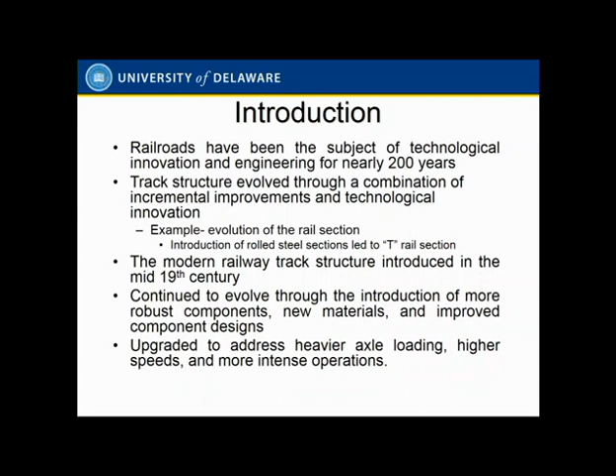Early railroad engineering focused on building railroads, and we're still doing some of that. Right now the big new railroad is California. California is building a high-speed railway, and we build some railways here and now, with new innovative construction techniques. Certainly in China right now, where they've just built 10,000 kilometers of high-speed rail in the last decade and a half or so, there are new innovative construction techniques.

But for most of the world, railroad also consists of maintaining the structure. A lot of the innovation, a lot of the opportunities, a lot of the applications of sophisticated technology are coming to bear in the maintenance. So we sort of have two hats when we're dealing with the railroads: we're dealing with railroad engineering.

We have building the railroad, designing the railroad track, and then we have maintaining the railroad track. Railroad engineers do a little bit of both, and depending on where you are, you'll emphasize one over the other.

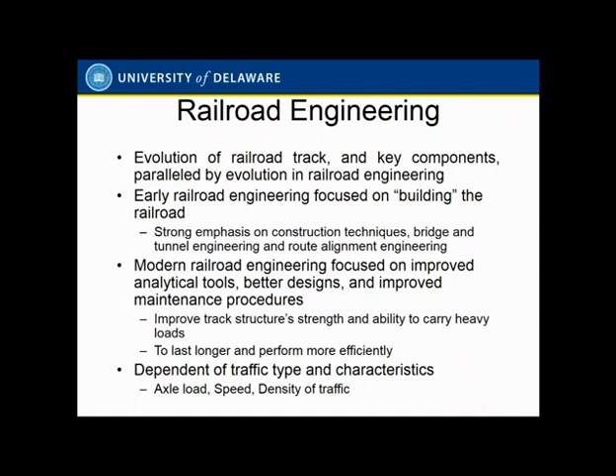Okay, so what constitutes a railroad? Well, railroad comes in various shapes and sizes and flavors. We have freight, which is what you see heavily in the United States.

The first question I'm usually asked when somebody introduces me as a railroad professor is, why do we have such a lousy railroad system in the United States? Well, the reality of it is, according to the World Bank, not according to me, we actually have the most effective and efficient freight railroad system in the world. Our passenger systems can use some improvement, but we actually have, again according to the World Bank, one of the most effective freight systems in the world.

And so when we talk about freight, we talk about conventional freight, mixed freight, heavy axle load, unit train operations.

Here in Chicago, you don't have to go very far to see a bunch of freight trains going by. You just got to drive down the road and see them going out.

Then we have passenger rail. The high end of passenger railroad is, of course, the glamorous high-speed rail. High-speed rail, as we'll talk about in a few minutes, means many different things to different people. There's no uniform definition of high-speed rail.

Then we have conventional interurban rail. Interurban rail is when we go from one city to another. Basically, if you take an Amtrak from Chicago to New York, that's an interurban rail operation.

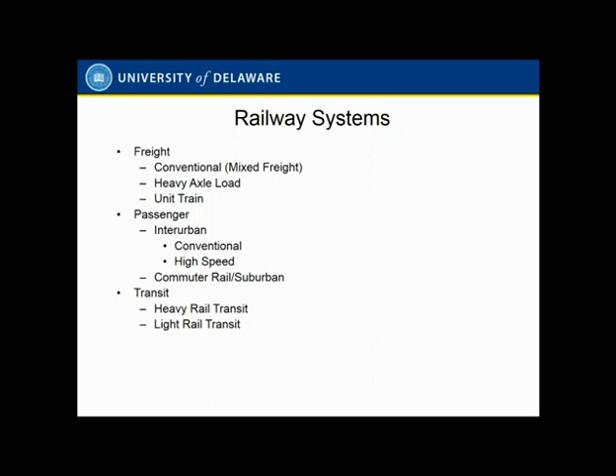Okay, so I want to talk a little bit about the track, the engineering behind the track, maybe a little bit about vehicle-track interaction, because you really can't talk about the track without defining the load environment of the track. And the load environment of the track is primarily, but not exclusively, the trains.

So the purpose of the track structure is to support the trains at speed, guide them, because as we know, there's no differential steering in a railroad axle, so the track has a guidance function. It also needs to damp noise and vibration, which again becomes very important.

I remember one time I was in London Underground doing a grinding project. We were in the middle of the city somewhere, and the London Underground engineer came to me and said, 'We can't have any noise and vibration at this location.' And I asked why. He said, 'Madonna lives up there.'

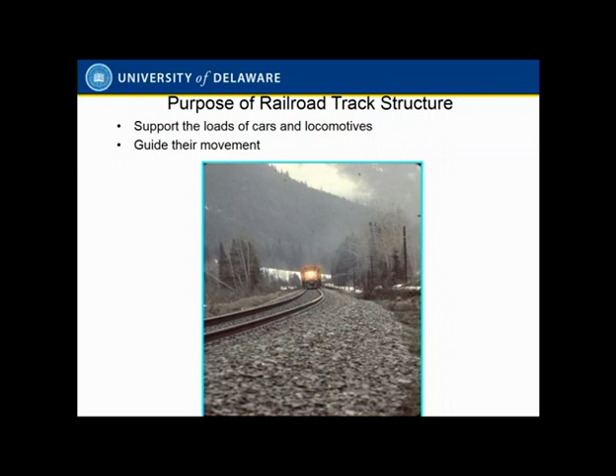Control of noise and vibration is another of the many functions of railroad track, and one that's taken on increasing importance. Again, this is one of the areas where we're looking to improve and innovate and develop techniques to do so. Okay, so, the railroad track.

Railroad track is still primarily ballasted cross ties, rails on cross ties on ballast. The cross ties can be wood -- 90% of the ties in the U.S. currently are wood. They can also be concrete; we get about 9% concrete in the U.S. In Europe, it's about 60 to 70% concrete. They still have about 30 to 40% wood, even in Europe.

Other parts of the world are often driven by relative cost. This is where engineering economics come in as well. Those are the big two cross-tie components. But we also have steel, which is a niche component, and we have growing interest in plastic and composite, which is no surprise considering the trend in society and engineering towards sustainability, recycling, and more use of non-traditional materials. So that's a growing sector.

There's still some playing around with other designs other than cross ties, such as frames or longitudinal ties, but again, you don't really see a whole lot of them. If you're going to go to a ballasted track structure, it's going to be a cross tie structure. Non-ballasted track is either slab track or embedded track, which is your trolley track that runs in the street. That's still a relatively small niche, even though some high-speed operations have started to look at it, particularly for tunnels.

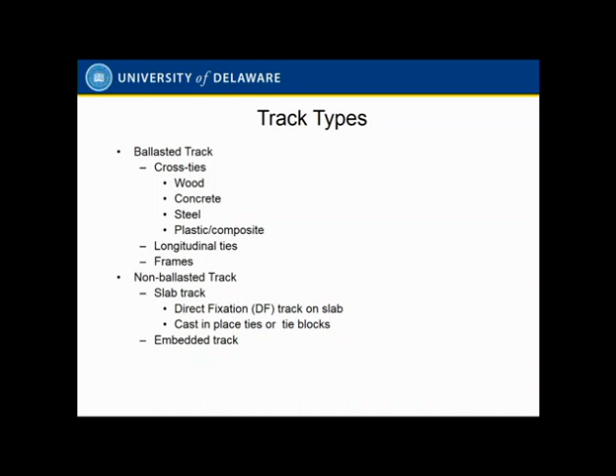So we're starting to see a lot of focus here, and a lot of interesting engineering going on. The Chinese are doing a lot of work in this area, and the Japanese have done a lot of work too. But if you look at the bread and butter type of track that we're really focusing on for most applications, we're still in the good old-fashioned 19th century ballasted track, just with better components, better fasteners, and better materials, all of which we need to deal with.

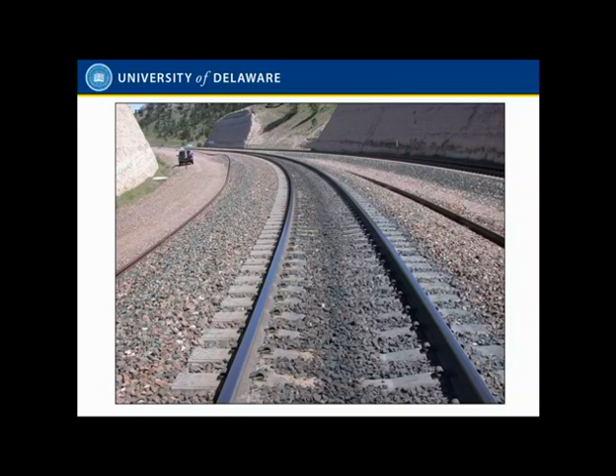Likewise with noise and vibration, take the Madonna situation - that was in the London Underground, and that was slab track. So guess where the noise and vibration attenuation has to come from? Certainly not from the slab, so it has to come from the fastening system. The good old ballast, that piece of rock sitting down there, has wonderful noise and vibration attenuation characteristics. Once we get rid of that, we've got to replace it somewhere.

So there's a lot of subtlety in the engineering, but there's some real engineering involved. And by the way, the design of noise and vibration direct fixation fasteners, which is very important for metros, is another area of innovation that continues to grow and expand.

Okay, so let's take a step back and talk about the basics of design.

When you start with the basics of design, you start with your load environment. The purpose of the track structure is to take this very heavy dynamic load and gradually distribute it so that the clay sitting underneath the ballast layer doesn't collapse, disintegrate, fail, or liquefy, but instead the stress levels get distributed down to the point where it can be handled by the subgrade.

This is what I call my inverse pyramid of stress. At the wheel-rail interface, my stresses can be of the order of 100,000 psi, about 700 megapascals. It's an interesting situation.

The whole world is metric except the United States railway system, which is English. So when I talk to railroaders, and I understand we have a whole bunch of them listening in, I better stick to English, because when I start talking about megapascals their eyes blur over. When I go over to Europe, it's the exact opposite - what's PSI? I have to go through a whole discussion. So most of my slides will have both, so you can pick the numbers you want to look at and be comfortable with.

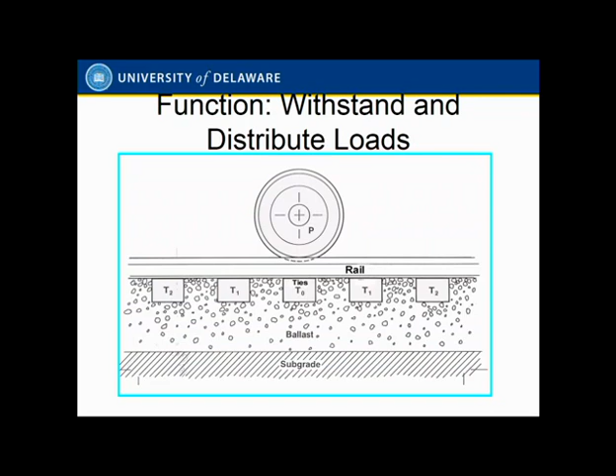So then I have to go through my ballast. If I have a really good granite ballast, which a lot of railroads want to use, that's good for about 85 PSI. If I have a not-so-great ballast, then maybe I'm in the 50 to 60 PSI range. But you get the idea.

And then ultimately here's my subgrade - this is what was there when I built the railroad, or what I filled it in with if it was a fill. Cut, it's the original material; fill, it's what I dumped in there to fill up the valley. And so this is 20 psi.

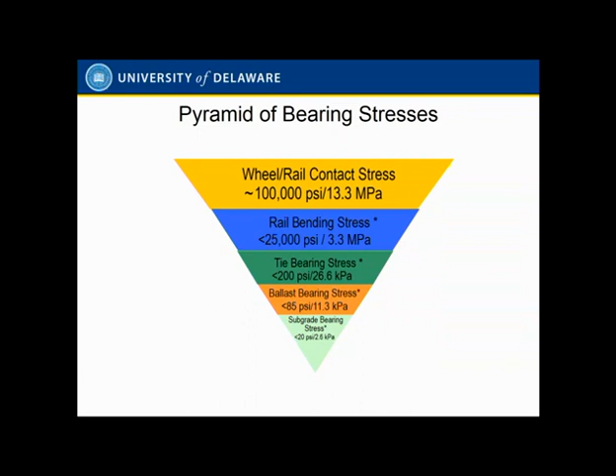So you notice where I'm going - I'm going from 100,000 psi to 25,000 to 20 psi. That's non-trivial. And so, wait a minute, maybe there really is some engineering involved in railroading. And if nothing else, look over here.

So the focus of engineering analysis - you know, this is a university, so we're heavy into mathematics and equations, and I'll throw a few on in there just to keep you honest. But basically, the focus of engineering analysis is the strength of the track and its components: the ability to resist catastrophic failure.

Certainly, if a rail broke every time a train went over it, we'd have a big problem. So we need to do something. And by the way, that's not so laughable an idea for catastrophic failure.

In the 1970s, when Amtrak first put in their concrete ties in the Northeast Corridor, they had a rash of cracked concrete ties. Why? Because it turned out the freight cars operating on them had a whole bunch of wheel flats generating dynamic loads that were 3, 4, and 5 times static loads. So all of a sudden you were seeing dynamic loads well over 100,000 pounds per wheel. That was just cracking the concrete ties, and that led to a whole bunch of engineering, standards, and controls - both on controlling the load and developing components to resist failure, such as improved attenuation characteristics of our fastening system, which now has another function: attenuating dynamic loads going down into the tie, so the ties don't crack.

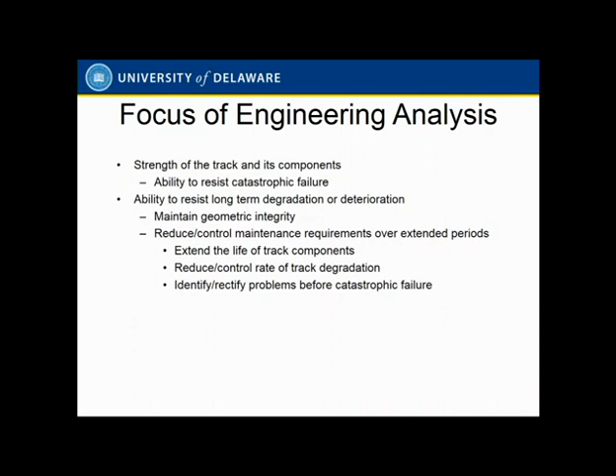So we need to extend the life of track components, reduce the rate of degradation, identify and rectify problems before catastrophic failure. One of the really hot areas we deal with right now is improved inspection technology to allow us to identify and rectify problems - and not only that, predict. As opposed to waiting till things fail or start to fail, actually predict it. That's another area of exciting research that goes on in the railroads. I get excited very easily - I get excited by railroad research.

Okay, back to the load environment, because we can't do anything on a track without a load environment. Railroads are subject to vertical loads coming down from the vehicle, lateral loads primarily going around curves - but if you have truck hunting in your tangents, you're going to get some nice lateral loads in your tangents too - and then longitudinal loads. The vertical loads come from the railway vehicles, the lateral loads come from the railway vehicles, the longitudinal loads come from the railway vehicles.

Oops, wait a minute - we also have another actor in here. We have environmental effects, thermal loads. The longitudinal loads generated in continuously welded rail by the simple expedient of the sun rising and setting, or getting hot or cold, are quite significant - on the order of 100 tons or more per rail.

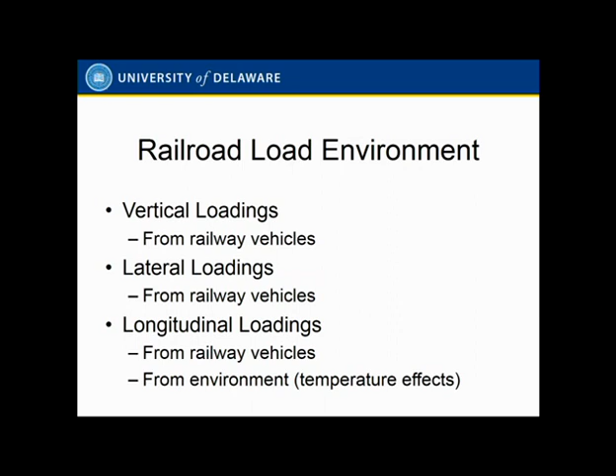So all of a sudden you're seeing some really serious numbers there as well. Okay, let's talk a little more. Let's start with the vertical load. The vertical load is the primary load used in engineering. If I'm going to start off a design of a new track, I start with the vertical load.

I take a look at what my axle load is, my static axle load, my dynamic axle load, and what's happened. If we look at the history of railroading, one of the things that differentiates us from our 19th century brethren is they had maybe 8,000-pound wheel loads, and we have 36,000-pound wheel loads. So we've gone up by a factor of 4.5.

And that's just static, that's just the weight of the car standing still. In fact, the pace of growth of axle loads, axle loads are growing, have grown, and will continue to grow, is set by the ability of the track structure to support it. Which means that basically no sooner do the engineers breathe a sigh of relief and say, hey, I figured out how to survive under 36-ton axle loads, the operating people and business people say, great, let's go up to 39-ton axle loads because that's when I get some more economies of savings.

And then we have high-speed rail loads, which introduces some really interesting dynamics, and that also introduces other variables such as the unsprung mass of the vehicle.

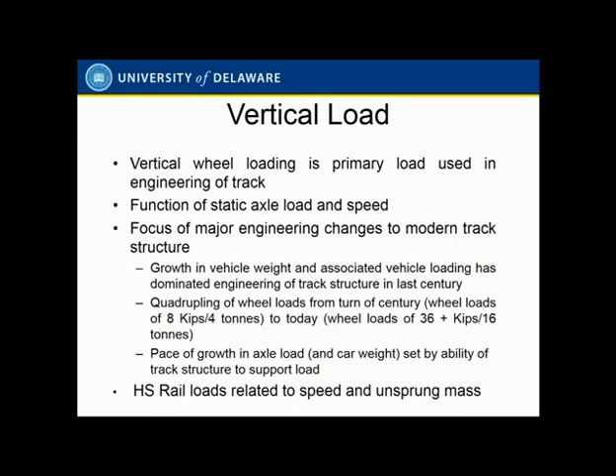Okay, if we look at static wheel loads in the railroad world, they're all over the map. Let's start from light to heavy. In the transit world, we have light rail transit, the old trolleys now called LRTs, and they run about 8 metric ton axle loads, 9 short tons. A metric ton is 10% more than a short ton, 2,200 pounds versus 2,000 pounds. So that's about an 8,800 pound wheel load. Heavy rail transit, CTA for example, they're probably in the 13,000 pound wheel load, 13-ton axle load.

Then we move up into passenger equipment, and there we see numbers going up as much as 19-ton axle loads—except that if you look at Amtrak, and take Amtrak from Chicago to, say, Seattle, you're going to see a locomotive in the front end. And I promise you that locomotive is not a 19-ton axle load. That locomotive is designed to heavy axle load freight standards, which we'll talk about in a few seconds.

Okay, then we have our European freight limits. The UIC standard limit, the maximum allowable limit for axle loads in standard use in the Union of UIC, is 22.5 metric tons, which is 25 short tons, or 25,000 pound wheel loads. The UK, in some selected properties, allows going up to 25-ton axle loads, or 25 metric tons, 27.5 short-ton axle loads.

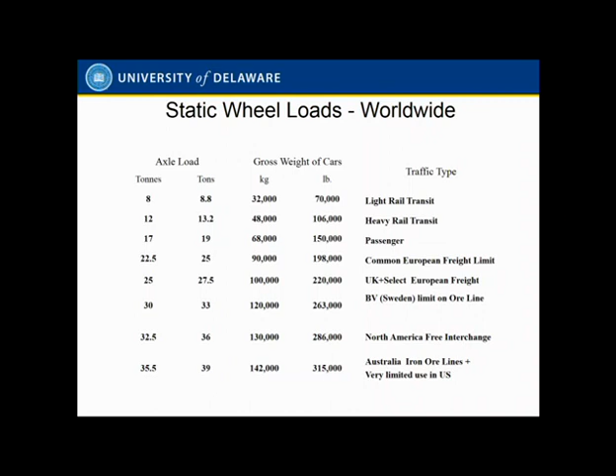If we look at the history of static axle loads - I'm still in the static world, haven't gotten to dynamic yet - you'll see we've been on an upward trend, and in fact it's been step functions. I personally lived through two of these step functions. When I came into the industry in the mid-70s, they had just transferred from basically 220,000-pound cars to 263,000-pound cars. So they went from 27.5-ton axle loads to 33-ton axle loads. The railroads were struggling, and the track engineering department was struggling with how to maintain track under these axle loads. It took them a number of years, and by the time the 1990s rolled around, they had it all under control.

At that point in time, I was part of this one. The Burlington Northern had a very aggressive research group, and they decided to look at whether they were optimized at 33-ton axle loads. We did a bunch of engineering economic studies and said, wait a minute, there's a lot of room for improvement. You can increase your bottom line, reduce your overall cost of operations by going to 36-ton axle loads, because that reduces fuel, reduces number of crews. You carry more paying commodity in a car - the ratio of what the shipper pays you to transport versus what you have to pay for the dead weight of the car increases. So they went ahead and did that, and the rest of the industry said, that's a good idea, and followed. Now that's the 36-ton axle load we're at right now, and that took about 20 years.

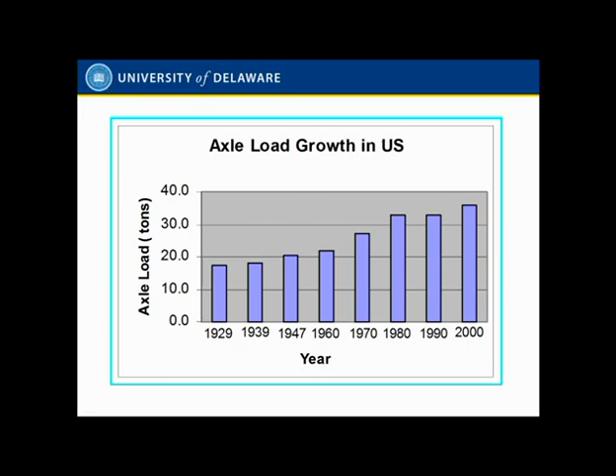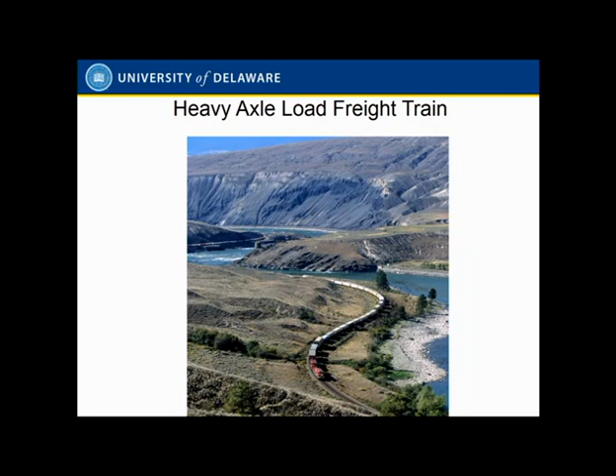And this is a nice picture, because every once in a while you've got to throw one in - railroads have pretty pictures. This is a nice, long, heavy freight train, probably about a 14,000-ton freight train, going through the Canadian Rockies.

Okay, so far we've been standing still. So let's start moving. Let's look at the speed regimes of different operations.

Transits really have to go short distances. There's no point in accelerating to 90 miles an hour to slam on the brakes to stop at the next station. You can get the same benefit without the energy waste by just going at 50 miles an hour. So you very seldom see transit operate more than 50 miles an hour.

Heavy axle load freight, excluding double stacks and intermodal, runs at 40, 45, 50, sometimes maybe 55. But again, coal is not on a rigorous schedule. It's more a question of reliability of shipment than how quickly you can get it there.

Coal is certainly not going to perish. Iron ore is not going to perish. Even wheat, you're not going to have a problem if it takes an extra day to get to the ship. So we can tolerate that. Conventional freight maybe goes up to 60.

Intermodal, well, if it's Christmas season and Walmart is shipping Chinese containers to the East Coast, they want to move a little bit faster because they do have a schedule to meet. So double stack trains can operate at 79 miles an hour, rounding it up to 80. The FRA actually won't let them do 80 unless, for a variety of reasons, the signal system allows it, but they can go to 79 miles an hour very nicely.

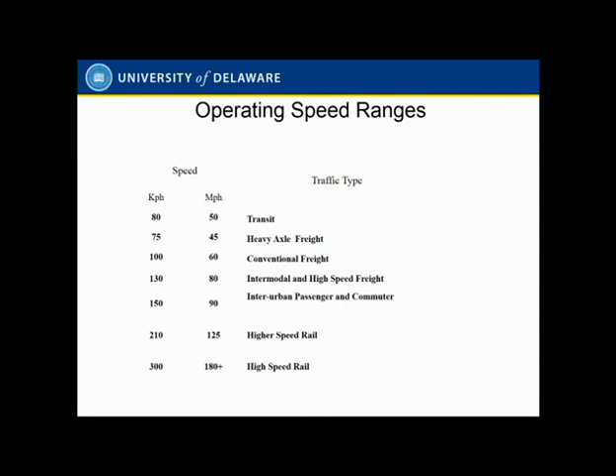And then we have the rest of the world's high-speed rail, which is 180 plus. The Chinese are over 200. I've ridden trains in China that have gone over 200 miles an hour. So we're still looking to improve that. And of course, just to remind everybody, we've got pictures of trains.

Okay, so now once we start going at speed, our static loads become dynamic. And in fact, when we're doing our engineering analysis, we're going to deal with dynamic loads. So dynamic augments to static loads are significant.

They're due to track geometry imperfections, and the higher you go, the greater the effect, which is why track geometry standards get tighter and tighter the higher the speed, specifically because of the dynamic loading and dynamic behavior. Rail and wheel surface defects and wheel defects, I promise you, are significant and dramatic, and they have to be controlled, which we are doing.

Increases in operating speed and unsprung mass, stiffness transitions, and all sorts of things which we could spend an entire semester talking about, much less an hour lecture, lead to dynamic impact factors of 4 or greater.

So I have my 36,000-pound AAR interchange load. We've measured loads over 140,000 pounds per wheel dynamically. And there's lots of data out there that shows that. And that does all sorts of nasty things to rail, ties, and ballast.

So much so that the AAR interchange limits have finally put in a dynamic load. In the past, the idea was, well, we don't want to have wheel flats, and we don't want to have certain other classes of wheel defects that we know generate dynamic loads. But the problem is there's always something else that comes in.

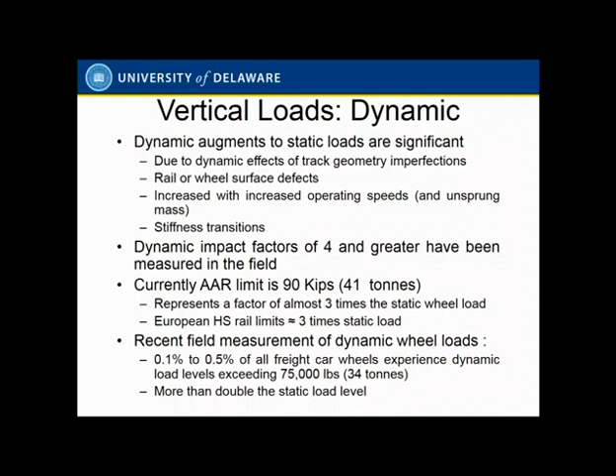Okay, that's just the vertical load. Now we have the lateral load environment. Lateral loads are associated with the way we go around curves. Again, the use of the rolling radius differential in the wheel sets only goes so far, and then we generate loads. We have centrifugal effects, we have curving forces, and they generate loads that can be quite significant. In fact, so much so that high-speed railroads really don't allow curvatures greater than 2 degrees, and some of them won't even allow curvatures greater than 1 degree.

You go to a high-speed railroad, a 1-degree curve, a 5,000-foot radius curve, is a sharp curve. Now go over to the Union Pacific and tell them that a 1-degree curve is a sharp curve, and they'll laugh. But go to the TGV in France and tell them, and they'll say, oh yeah, that's a sharp curve.

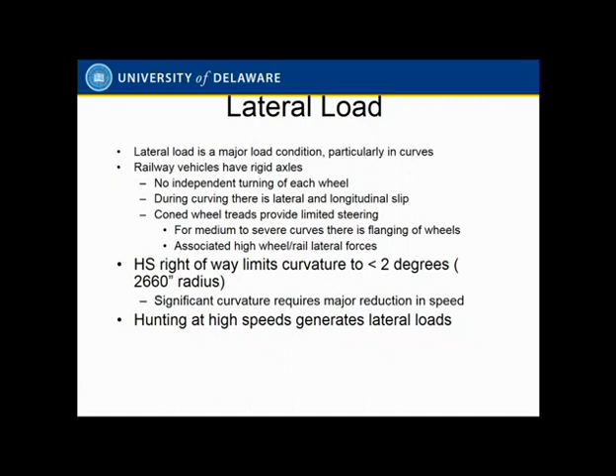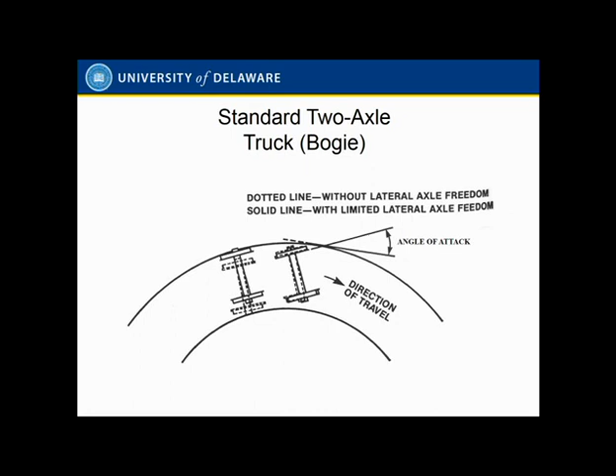Okay, so we have centrifugal force, we have curving force. Most freight trucks or freight axle sets do not remain radial to the curve, so we have this angle of attack, and so this wheel set sort of goes bouncing around the curve, generating nice dynamic loads. So lateral loads include steady-state curving, such as our centrifugal forces, transient forces such as our curving forces, localized slip-related forces, and flanging forces, which are related to the curving forces.

All in all, we see lateral loads that can be as high as 30,000 pounds, in addition to vertical loads. And what does that mean? That means that we can see some of the very high-stress conditions that are normally associated with heavy axle loads in curves, just because of the higher lateral loads. And I'll give you a specific case of that in a few moments.

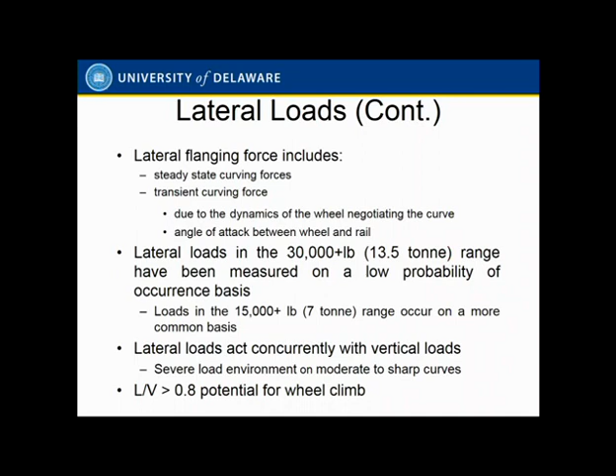Loads in the 15,000 pound range are quite common, and when we get to L over V ratios, that's a ratio of lateral to vertical loads. If you're in Europe, we call them Y over Q. I have no idea where the Y and Q terminology came from, but they call lateral loads Y and vertical loads Q. An L over V ratio greater than 0.8 starts our potential for wheel climb. It varies with a lot of factors, but that's sort of a rule of thumb type of starting point.

And then we have longitudinal loads, as if vertical and lateral is not enough. So start off with our mechanical loads. Well, what do we have mechanical loads from? First of all, I got trains braking into stations and accelerating into stations. Okay, what kind of forces can they give me?

Well, New York City built a people mover going into JFK called the Air Train. And if it's a 5-ton axle load, I'll be shocked if it's that heavy. There's a fairly steep grade, about a 10% grade on that route. And after about 6 months of operation, I got a call from the engineering people saying our rail is moving longitudinally under this 5-ton axle load, 2-car train set, one that's running every 2 minutes.

Why? Because I'm braking going down that grade, and I'm generating longitudinal forces. I'm braking going into that station. I'm accelerating coming out of that station. I'm braking going down the mountain. I go over the Rockies, I'm braking. I'm generating longitudinal forces.

We've measured, or the industry has measured, longitudinal forces as high as 60,000 pounds per rail. That's significant, and while that's high, 20 to 30,000 pounds of force is more realistic. But that's just the mechanical forces.

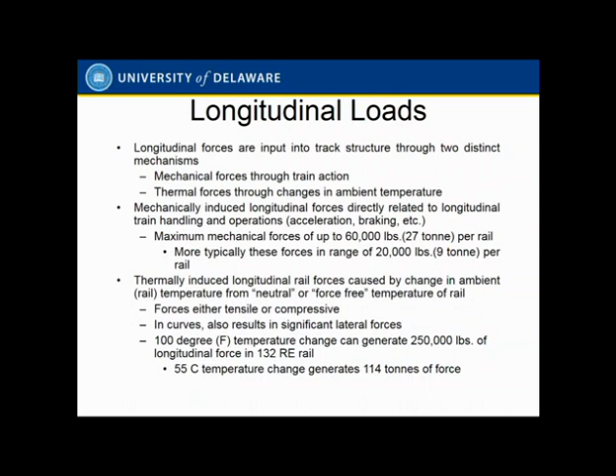I was involved in a light rail system. They were building a really fancy bridge, and most of the bridge designers were highway bridge designers. So what do they do? How do you design a bridge? Dead load, live load, wind load. But hey guys, what about rail load? If I have 2 tracks going through my bridge - that's a transit bridge - I have 4 rails, at 250,000 pounds per rail, that's 1 million pounds of longitudinal force. Does that affect my bridge design? You bet it does. So again, if you don't know your loads, you can't even start doing your engineering design.

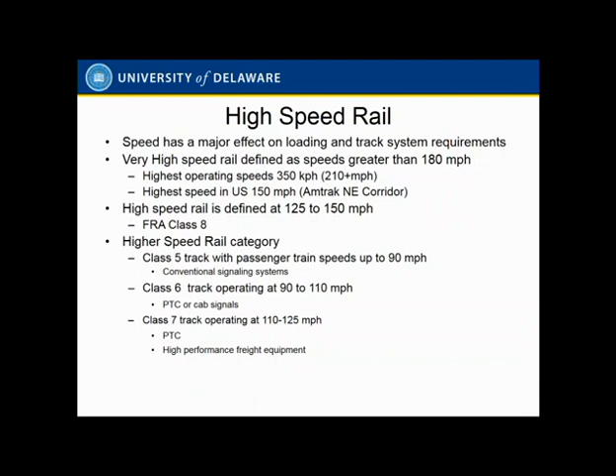In fact, FRA defines high-speed rail as 125 to 150, and defines higher speed rail, as I said before, between roughly 90 and 125. You can see we've got Class 8 at 125 to 150, Class 7 at 110 to 125, Class 6 at 90 to 110, etc.

So we have a whole bunch of issues associated with high-speed rail, and then a whole bunch of issues associated with mixing high-speed rail with heavy axle rail, which most of the world doesn't do, but crazy Americans do - certainly in the Northeast Corridor.

So again, we talked about maximum allowable curvature. We want as small a curvature as possible - we want to design to a minimum curvature, so curves less than 2 degrees at worst, and probably less than 1 degree. By the way, it's only the Americans who talk about degrees - the rest of the world talks about meters of radius. So you've got to be conversant in both, able to translate degree of curvature to radius in your sleep. That's a good exercise for students.

Okay, elevation, because I'm going around even these sharp curves - very tight geometry requirements, as I said, imperfections in the track structure.

Oh boy, I'm still talking. I'm on a roll, I'm not even halfway through my presentation. What time can I go till? 5:30 is when it cuts off. Okay, we'll try to speed it up a little.

A couple of things I want to show, so we'll go through it: high-speed track geometry requirements, enhanced grade crossing protection, etc. And then we have the track maintenance issue.

One of the issues we seriously have is high-speed rail has very, very tight geometry standards because of the dynamic load environment. If I try to run heavy axle loads on that, heavy axle loads will tend to increase my rate of geometry degradation. So all of a sudden I'm playing catch-up - I run heavy axle loads on a high-speed railroad, my geometry degrades. I could either be constantly doing maintenance, or I've got to slow my trains down, or I've got to get rid of my heavy axle loads, or I've got to improve my design, my maintenance planning, and my forecasting.

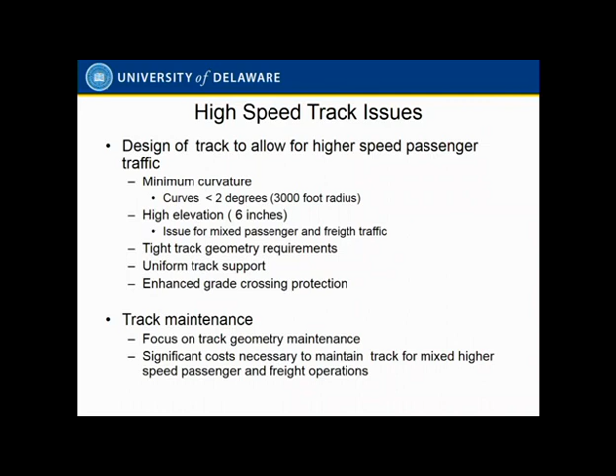Curvature and speed - just to show you quickly: your 180 mile an hour railroad has to drop to about 120 miles an hour in a 1-degree curve, 85 miles an hour in a 2-degree curve, and if you let a 5-degree curve creep in, you're down to 50 miles an hour. So you have to brake into the curve and accelerate out of it - you can't just go from 180 to 50 and back to 180. You have to brake at 1 mile per hour per second or less, and that takes time, distance, energy, etc.

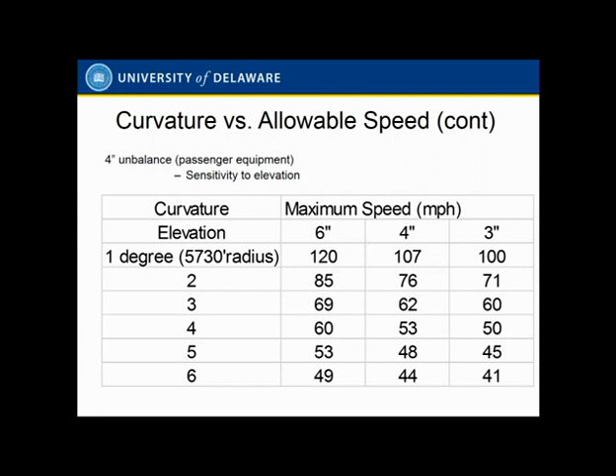So as I talked about, railroad engineering can be broken into design and maintenance.

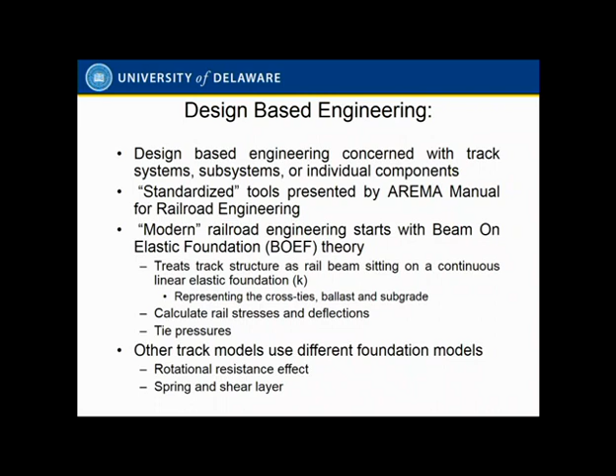Design-based engineering is load-dependent. The grandfather of engineering design is the beam on elastic foundation model, which says the rail acts as a uniform beam supported by a series of linear springs. That's the basic model, given by a straightforward fourth-order differential equation - no dynamic component, otherwise it would be a partial differential equation in distance and time, and no shear component, which would add a W double prime, a second-order effect. Then we put a concentrated wheel load over here, and the result is the deflection and moment curves we use to generate the behavior of our track structure.

There are a lot more sophisticated models out there, both closed form and finite element, but over the decades - because the beam elastic foundation model actually dates back to the 19th century, developed by a fellow named Winkler in Europe - it's such a good model, relatively easy to use and relatively accurate, that using it today still works pretty well.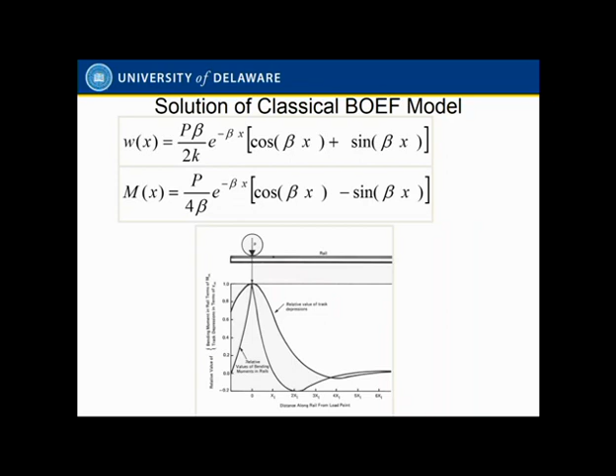And I will attest to that, because I still use it to this day. Even though I have other, more sophisticated models available to me, this functions quite well in predicting behavior. It also tells me that I'm going to get liftoff - if I have a wheel here, my track is going to lift off over here, and if you go out on your railroad and watch a wheel go by, lo and behold, the rail does lift off. It actually does duplicate reality.

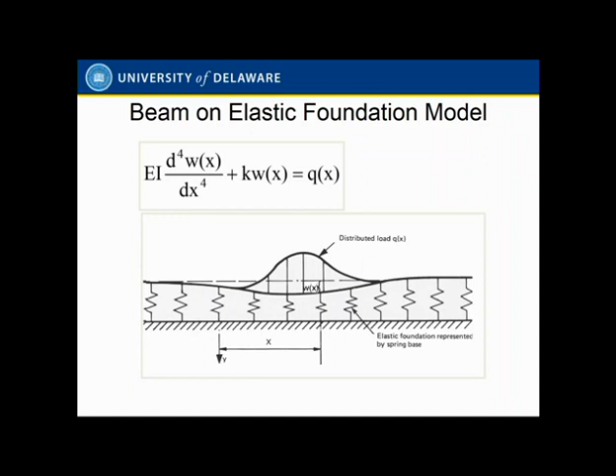Maintenance-based engineering is concerned with long-term performance, with a different focus for heavy axle load freight versus high-speed rail. In the high-speed rail world, geometry is everything - rail lasts a long time, ties last a long time, so maintenance focus is on geometry. In the heavy axle load world, rail is the big dollar item, followed by ties, then geometry, then ballast - still significant, but nowhere near as large as rail. So all of a sudden my focuses have changed.

Why? Because my degradation mechanisms and degradation modes have changed. And so maintenance has been, and continues to be, a focus for both heavy axle load and high speed rail, and every once in a while they converge.

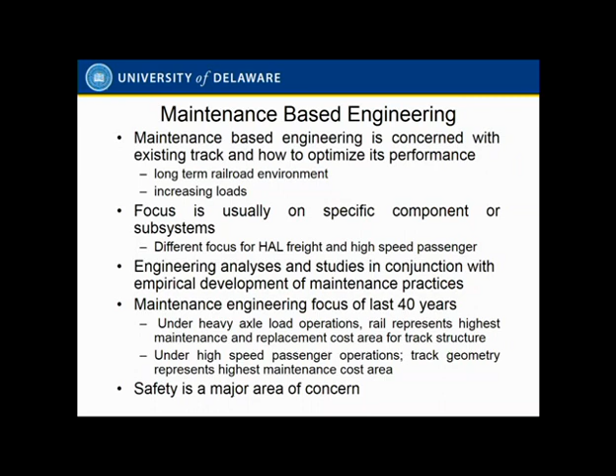Ultimately safety creeps in, because when we're doing maintenance and talking about standards, there are 3 sets: construction standards, which I build my track to very tight tolerances; maintenance standards, which are a lot looser than construction; and safety standards, beyond which I am not allowed to go without slowing my train down, because that results in a potentially unsafe situation. So setting my standards, and looking at how much time it takes to go from maintenance standards to safety standards, that's all part of maintenance engineering and modeling.

Okay, so continuing on - let's talk a little bit about rail. I want to get to a couple of rail issues here, because they're interesting. If you look at that wheel-rail contact zone and the behavior of the rail, you see it suddenly sees a whole bunch of interesting simultaneous and concurrent loading. Just looking vertical, let's take the tangent track - let's not even talk yet about lateral loads, and let's not talk about longitudinal loads. Let's just talk about vertical loads.

Okay, so first we have that wheel-rail contact stress, that 100,000 psi, which is very local to the surface of the rail, degrades very rapidly, so that by the time I'm halfway through the head of the rail, my contact stress is negligible. Then I have my bending stresses. My bending stresses are 0 around the neutral axis and maximum in my head and my base. And depending on where my load is, I'm either in tension in the base and compression in the head, or vice versa.

Then you can see that, so I go from negative to positive and then reverse when I have my uplift. Then I have my thermal stresses, which are nice and uniform through my rail section. By the way, there's another stress in here, which is my residual stress, locked in during the manufacturing process.

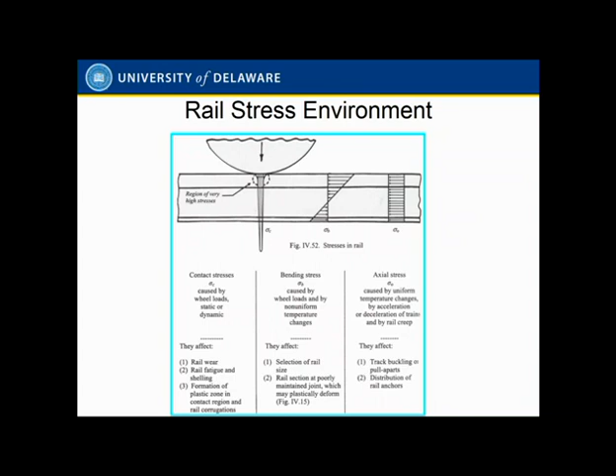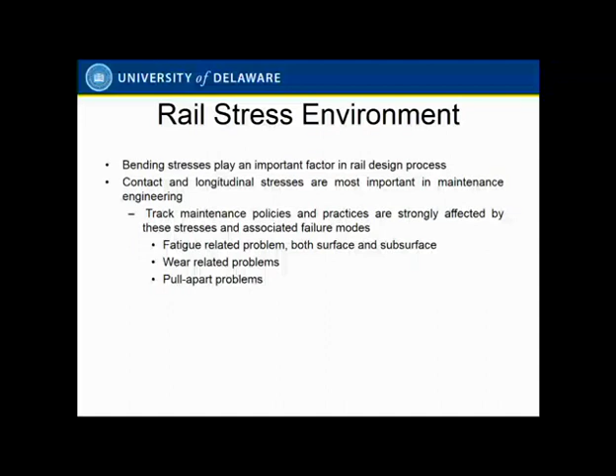All of these act concurrently. So what they do is compete with what ways the rail fails. Is it going to fatigue? Is it going to wear? Is it going to pull apart? What are my mechanisms? What mechanisms do I see in the railroad world? All of the above. And part of my issue is how do I address the different mechanisms.

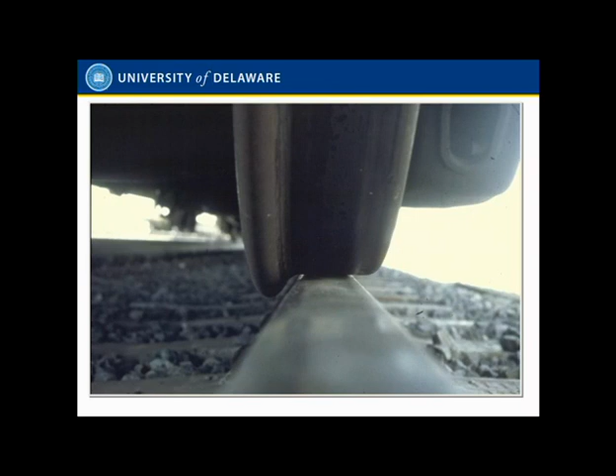Okay, so wheel-rail contact stresses. This is a 36,000-pound wheel load, allowed to go up to 89,000 pounds dynamically, hitting the rail in a contact area of about yay big, maybe about a quarter of a square inch. So I'm already plastic. I've already gone beyond the yield strength of my steel. So right away I've got to deal with that.

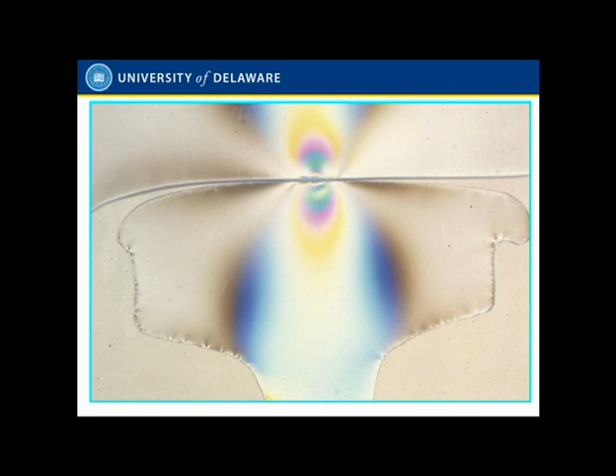If I look at it on a photoelastic basis, this is a photoelastic model of good wheel-rail contact, because I'm nice and centered. My wheel is sitting very cleanly on top of my rail. You can see, and by the way it's the number of rings that count, there's a significant number of stress.

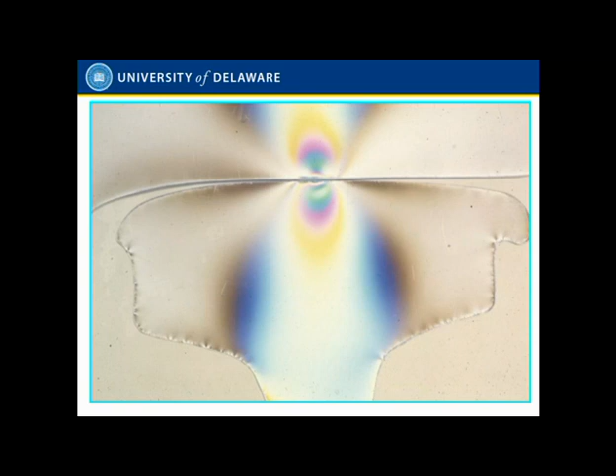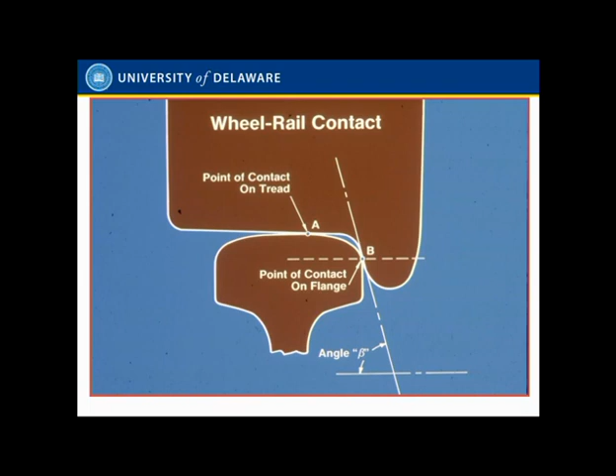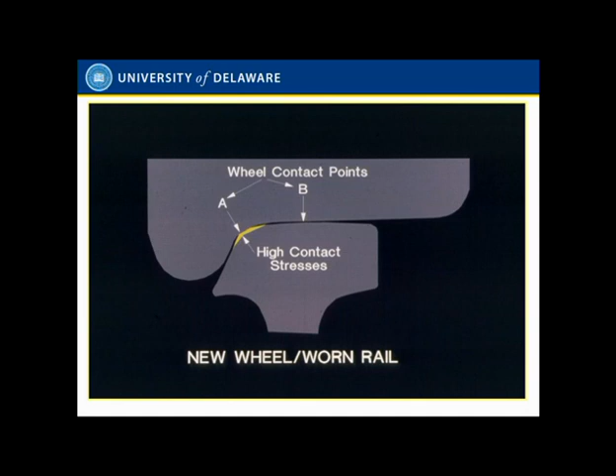Now let's introduce lateral loading. My lateral loading can be introduced by way of 2-point contact, which means I have one contact point between the flange of my wheel and the tread of my rail, and the flange of my wheel and the gauge face of my rail, and the tread of my wheel and the head of the rail. Or I can have 1-point contact, which is what we see when the rail wears in. So you go out to a curve on the UP or the BN or the CSX or NS or FAST or anywhere else, you'll see this very high conformal wear and this 1-point contact.

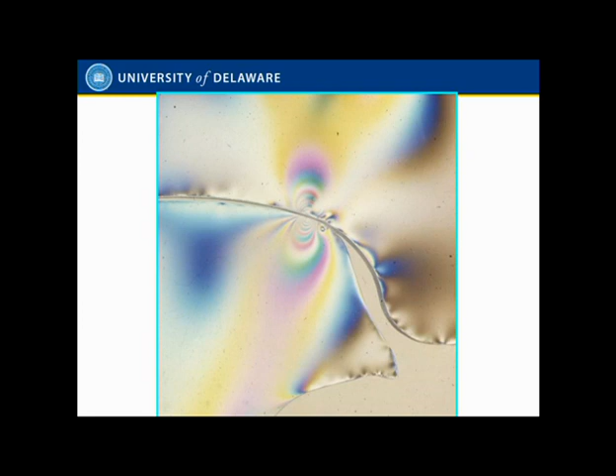And what happens to my stresses? Well, if I remember I told you the number of rings relates to the number of stresses, I've got a lot more rings in this picture than in the previous one. So again, I get to the point where I don't even need a heavy axle load environment to get into yield, because with a combination of vertical and lateral loads on that same point, I can actually go into yield stress and generate fatigue as well.

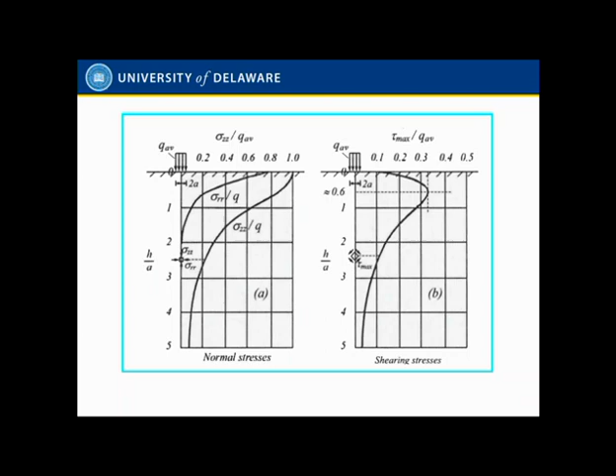So contact stresses are the first actor. Contact stresses are very interesting. If we look at the normal contact stresses, as you expect, they're maximum on the surface. If we look at the shear stress, something very interesting happens: the maximum is not on the surface, it's about 8 to 12 millimeters below the surface. By the way, when we look at most rail failure mechanisms, such as shells in the rail, where do they initiate? They don't initiate at the surface. They initiate about 8 to 12 millimeters below the surface, at the point of maximum Hertzian shear stress. Pure coincidence, of course.

So, wear versus fatigue, what dominates? Well, it's a function of axle load, and a function of curvature. Under light axle load, our European friends primarily get wear and some fatigue. Here in the heavy axle load world, on tangent track, it almost never wears out because fatigue comes much too quickly. On curves, where I have high lateral loads, there I can start to have competition between wear and fatigue.

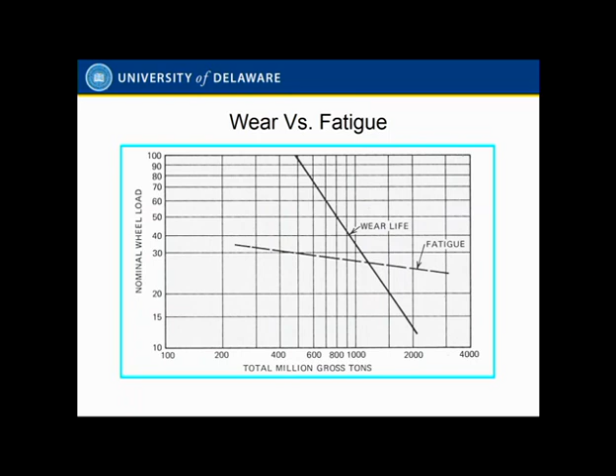If it's dry and unlubricated and standard steel, it's going to wear out. If I lubricate it and put premium steel in there, so I stop the wear or extend the wear life, then fatigue starts creeping its ugly head in, and then I have to deal with fatigue. So again, wear includes head wear, gauge face wear angle, all measures that we use.

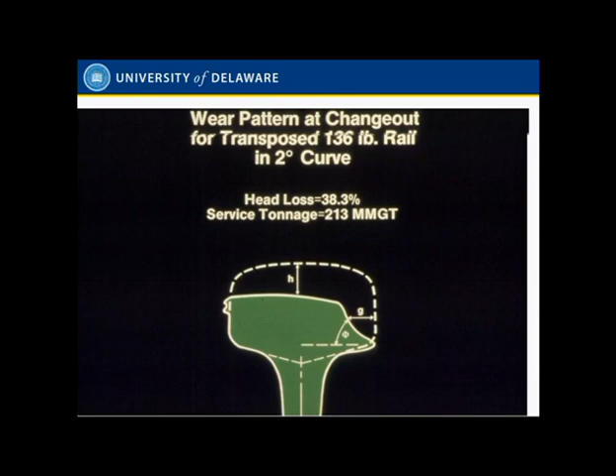We have all sorts of nice technology, ranging from the stuff they used to use when I went into the industry way back, like the old carpenter's gauge, to laser-based vehicle-mounted rail profile measurement systems, which are the norm now. Every major U.S. railroad has at least one of these. Every one of their geometry cars has one running down the track, taking nice profiles of the rail, measuring the wear, measuring the profile. It's state-of-the-art technology. How do we use that data?

That we're still trying to figure out. Because as the technology moves forward and we get more and more high-tech toys to measure our stuff, we're also drowning in data, and we're trying to figure out how to deal with it, which is a topic for another presentation, or a complete conference, which I run in Delaware.

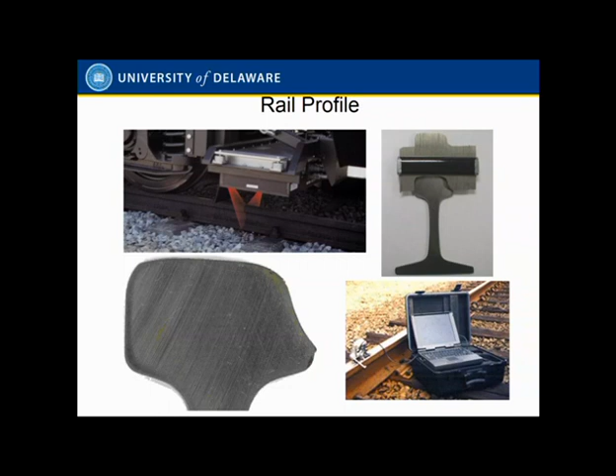So if I look at, so that was wear. Okay, then if I start looking at the surface, I suddenly start seeing this fatigue behavior. I see surface cracking, what we call rolling contact fatigue. I see the subsurface cracking at the point of maximum Hertzian stress, and that's going concurrent with wear. So if I have a very high rate of wear, this is not a problem, because I wear so quickly I get rid of the stuff before it develops. So I can solve my fatigue problem by allowing my rail to just wear very rapidly. The problem is that means I'll be replacing all my rail for wear every few years, which is not a good engineering solution. So I lubricate it, and I stop my wear, and all of a sudden I allow my fatigue to develop, which is one of the trade-off issues we deal with.

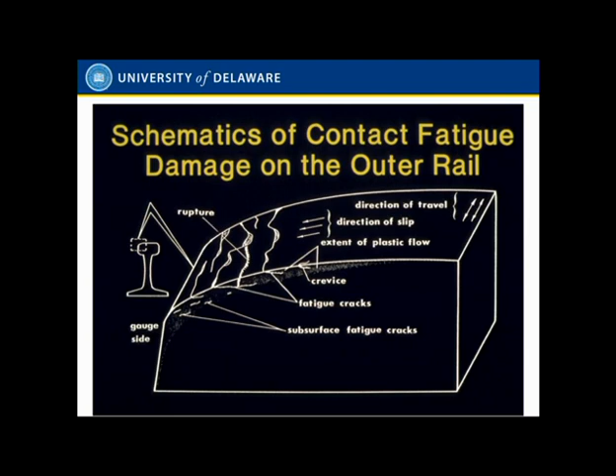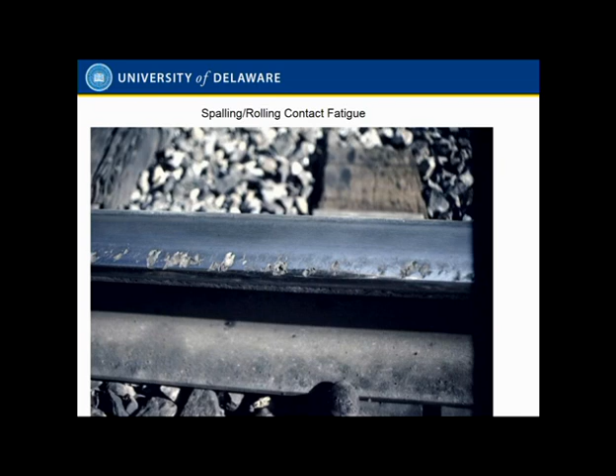So this is a fairly common type of rolling contact fatigue, a little bit advanced. By the way, you notice it's not quite normal, it's at an angle. That's because there's a longitudinal slip component, a lateral slip component. In fact, just the dynamics of the contact stress has given birth to many conferences dealing with the behavior at that local level, the tribology at the wheel-rail interface.

That results in the development of subsurface shells. Subsurface shells turn around. Here you can see the development of a subsurface shell. It grows longitudinally, not nice. But what's even worse is when they grow transverse. And this is a detailed fracture generating from a shell.

This is the single largest source of derailments and failures in the United States. We, in the United States, take out about 200,000 rail defects a year. That's the U.S. alone, about 20% of the world. We're a little bit ahead on a rate in the world because of our axle loads. But we take out 200,000. We have less than 200 derailments, which is not good, but those are broken rail derailments. That means we find 99.9% of all the stuff without a problem. It's the 0.1% that's a problem. We'll talk about that a little bit.

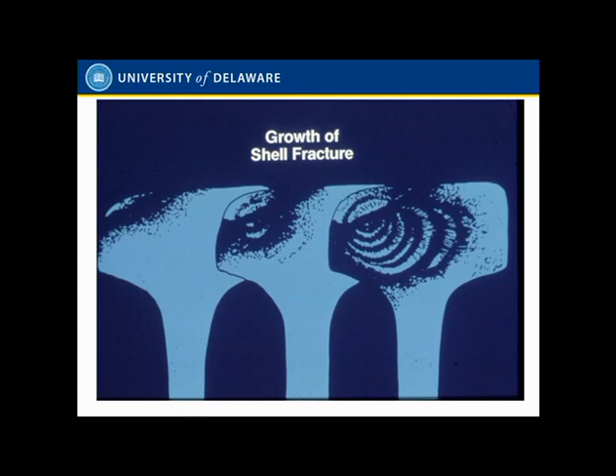Okay, and this is one of the problems. I like this slide. This is a detail. You can see this is a fairly large defect. If you look closely, that defect never broke the skin of the rail, which means that if I have my track inspector walking down the track, he's going to see a perfectly good rail. I need ultrasonic testing, or maybe somebody will come up with an even better technique, but ultrasonic testing is about 90%, not plus of 90% effective, so it's a good starting point. But I need technology to find this type of defect.

Which takes me to a derailment, which I use as an example. This is the Hatfield derailment that occurred in October 2000 in the UK. I happen to be very familiar with it because I was part of the team that was brought in by Network Rail at the time, actually it was Rail Track, to make sure it never happened again. Very interesting. First of all, it was a rolling contact fatigue defect, which is a North American heavy axle load defect, which the British said did not exist in the UK. I remember having specific conversations with colleagues in the UK saying, you guys have these high axle load stresses, we don't get those kinds of fatigue defects.

At the time they were inspecting for defects, they were using a 0-degree probe, just going straight down the center of the railhead. But detailed fractures or rolling contact fatigues are over in the gauge corner. If I'm looking at the center of the rail, I don't see it. So they weren't even looking at the gauge corner.

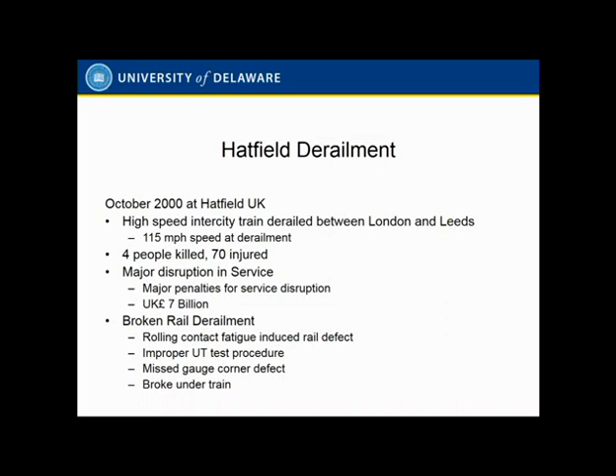Why? Because there are high dynamic loads. Remember, we allow 89,000-pound wheel loads. One wheel on a train is probably 75,000 pounds on average. So we have these high dynamic loads. And so if I have a defect that maybe represents 30 or 40 or 50% of the head area of my track, and along comes a wheel, it's probably the 45th wheel or the 350th wheel in the train, with that 80,000 pounds, it breaks it. Which explains, by the way, why the 40th car of the train derailed when 39 cars ahead of it did not derail over that same defect, which is always the question that gets asked.

So this was gauge corner cracking due to rolling contact fatigue, developing a detailed fracture from shell, and as I said, when they actually went out and did a real inspection at the right location, they found hundreds of them.

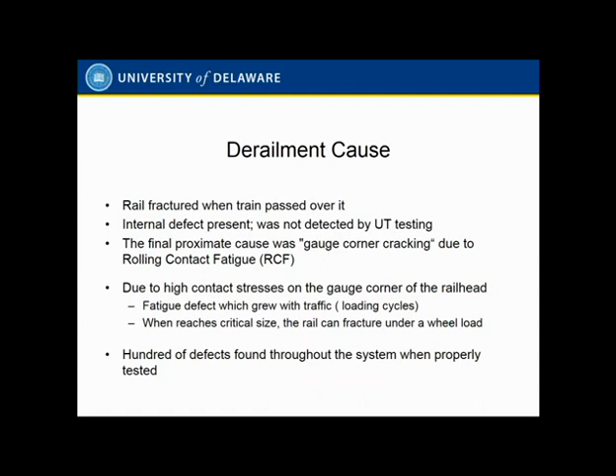Now, coming back to the U.S., actually, I think the last couple of years were a little bit less. I think we may be down to about 170, 180 rail-caused derailments. But we get about 200 rail-caused derailments a year. Average derailment cost is about $228,000. Expensive derailments. These are FRA-rated costs, by the way, which only includes track and equipment costs. It doesn't include cost of train delay, cost of rerouting, cost of the lading, etc. That's not included in any of these costs. True cost is probably more than $400,000.

Why so expensive? Because these derailments happen at speed. Because these derailments are on a main line, because that's where you get the high dynamic loads if you're going to break under a train, so you have all that energy. We basically have about roughly 1 derailment for every 1,000 defects we find, which goes back to we find 200,000 defects, and we have a little bit under 200 derailments a year.

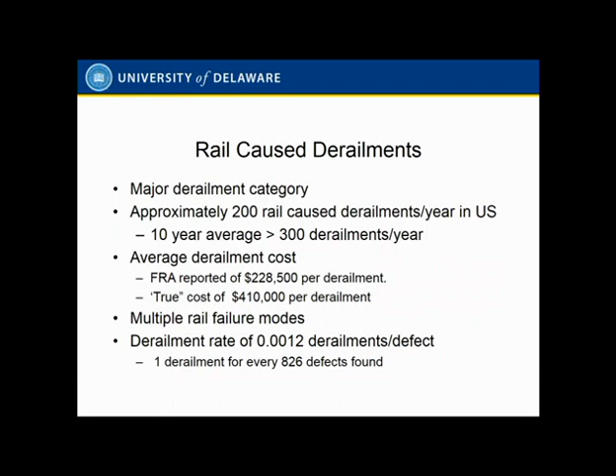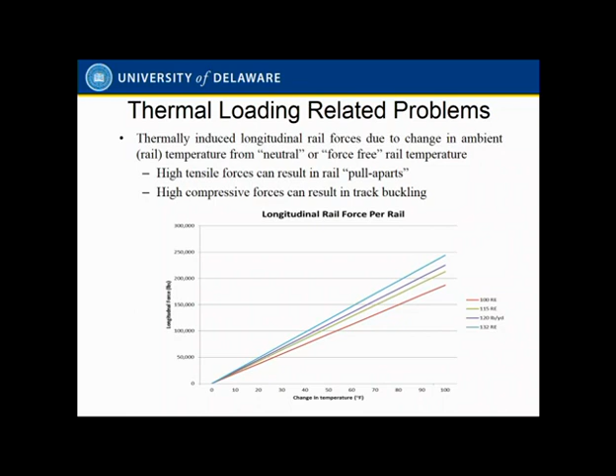Okay, so if it gets cold, we're in tension. What happens? We have a pull apart. Pull apart means we either rupture the rail, sometimes there's a weakness, sometimes there's a weld. So very often pull aparts are joints where we shear off a couple of bolts. But again, it depends on the change in temperature from the neutral temperature, since rail is locked in at a certain temperature.

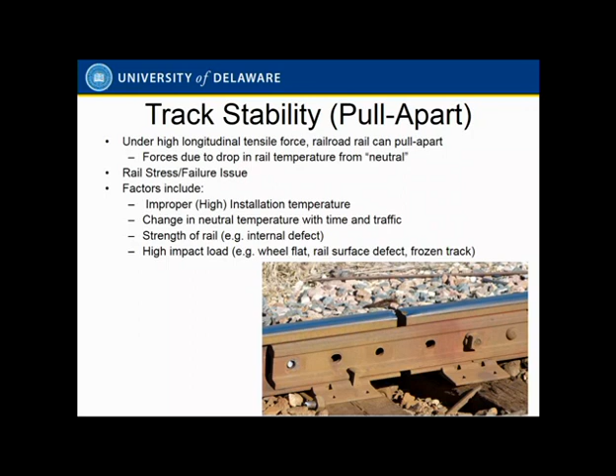If we lock the rail in at a very high temperature and it gets very cold, I have high tensile stress, I have a pull apart. So obviously we should lock the rail in at a very low temperature. Well, then if it gets hot, I get a buckle.

If I go to my track people or my operating people and ask, which would you rather have, a pull apart or a buckle? What are they going to say? I'd rather have a pull apart. Why? Because my signal system will tell me I have a pull apart and will stop my train.

If I have a buckle in front of my train or under my train, I have no warning until the engineer sees it. He's going to probably slam on the brakes when he sees it. What's going to happen when he slams on the brakes? He's going to put a nice longitudinal compressive force into that rail. What do you think is going to happen to that buckle? It's going to expand, right?

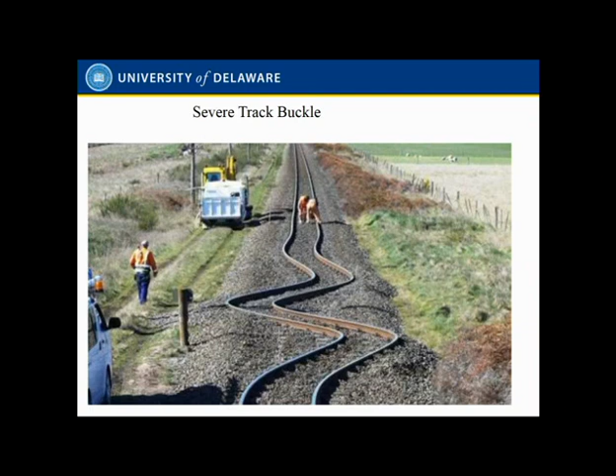So the normal reaction of the engineer is actually the absolute worst thing he can possibly do. There's a whole history of derailments associated with just that happening. He sees the buckle, puts the train into emergency, generates this additional longitudinal force, and what may have been 6 or 8 inches suddenly becomes 14, 15, 20 inches. And looks like that. No train's going to go across that, people.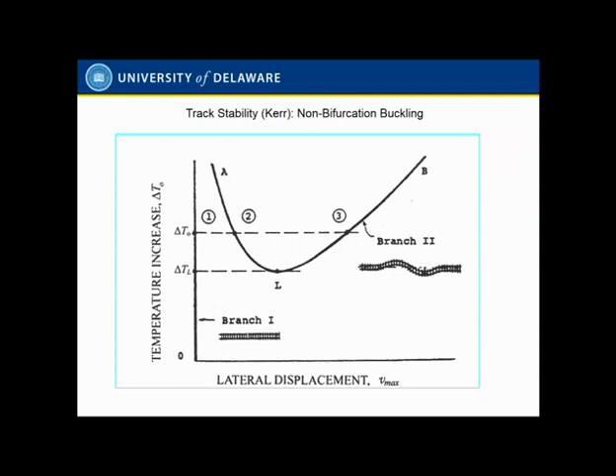Now, if I had the time, I'd talk about the fact that the buckling phenomenon is very interesting. There's a whole body of work on this. It is not your classical Euler bifurcation buckling, not your classical column buckling. It's basically what we call a non-bifurcation buckling phenomena with a stable state, an unstable state, and a stable state, and that's where we get the snap-through buckling, which means basically I'm straight one second.

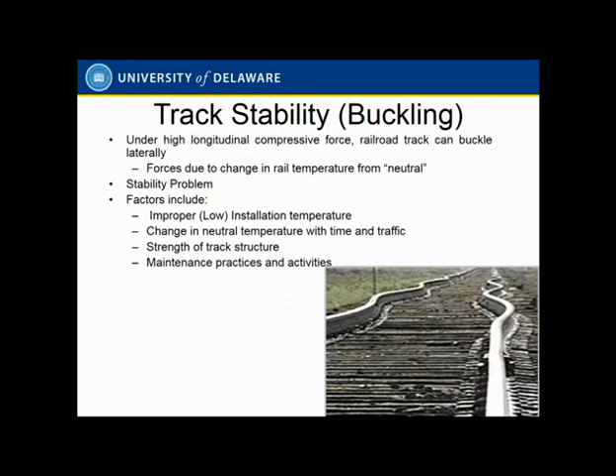I didn't put any videos in here. I have a nice video, but I didn't take the time to put it in here. It just literally snaps through. So it's not a gradual process, it's a snap-through process. And then it releases the longitudinal forces in that zone.

This is a derailment of an Amtrak train on CSX a number of years ago. There's a very detailed NTSB report out on this that you can look at. Classical overview, you can see that.

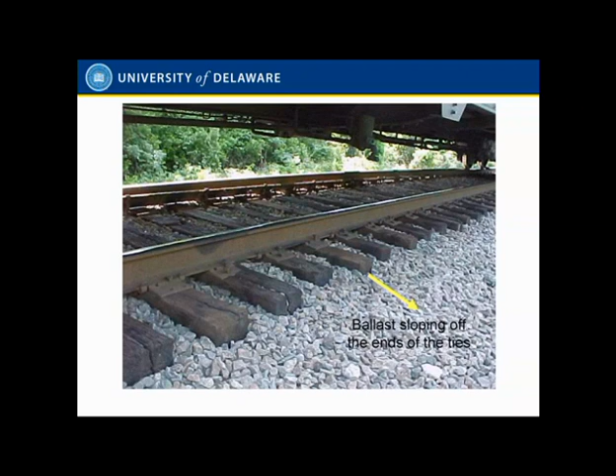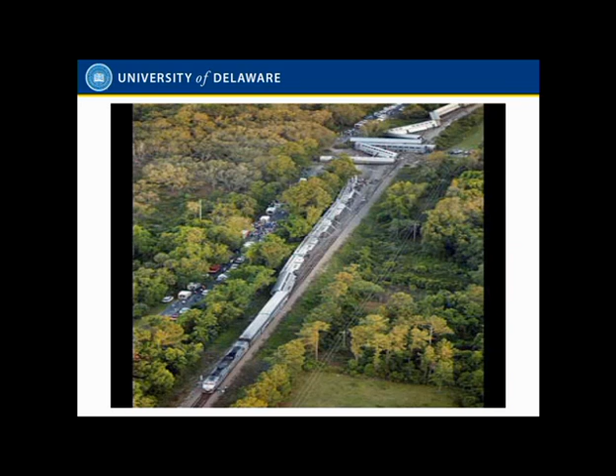This was a case where maintenance work disturbed the ballast tie interface, reducing the lateral resistance of the ballast and the shoulders, the ballast shoulders and the ties, making this track susceptible to a buckle, which happened. And this was another case where the engineer slammed on the brakes and increased the size.

Okay, if we look at the distribution of accidents by cause, and we look at the distribution of track accidents, first of all, let's look at all accidents.

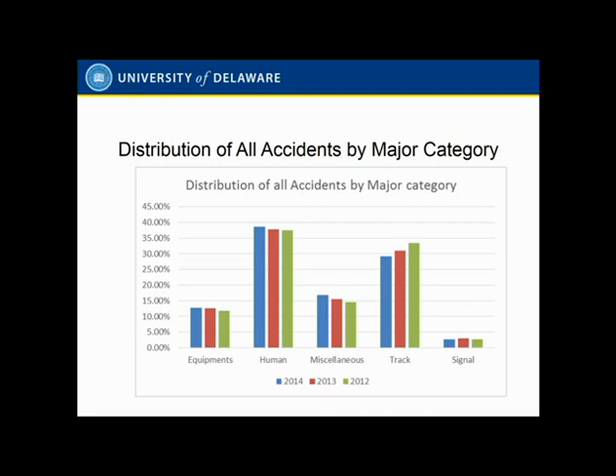Traditionally, if you look at FRA statistics — and by the way, this is all online, I'm sure you all know this is on the FRA website under their safety group — you can see that human factors and operations are the largest percentage by number, but there are a lot of low-speed yard derailments here. Track is consistently number two, but there are a lot of expensive track speed derailments here. Equipment's less, signaling is even less, and then miscellaneous always has a bunch.

If I look at my track ones, I see a large number of track geometry, rail and joint bar, frog and switches are sort of number three, and then everybody else is sort of in the noise ratio.

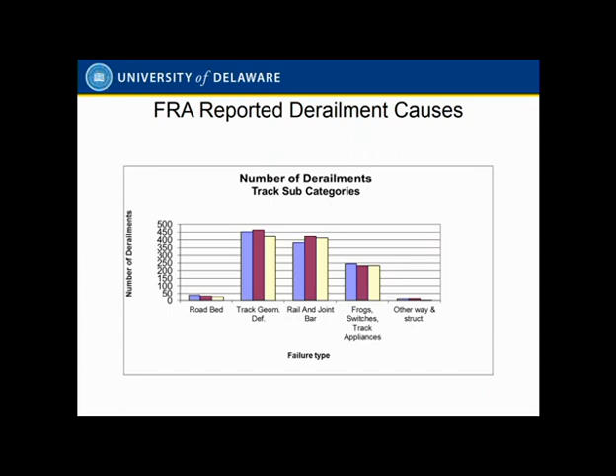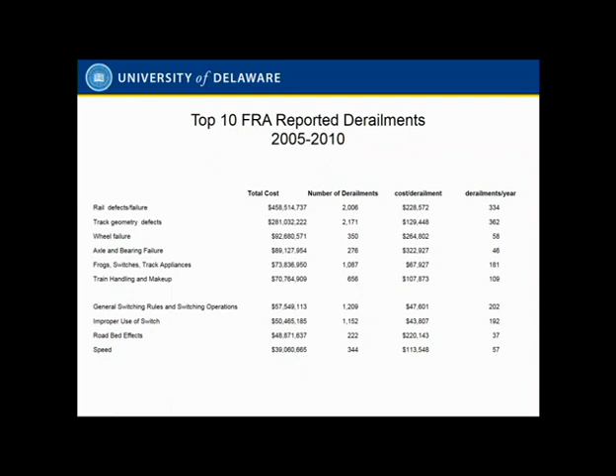It turns out that broken rail derailments are my most expensive overall category of derailments, followed by track geometry. I get more track geometry defects than broken rail derailments, but they're less expensive because a lot of them happen at lower speed. Followed by wheels and axles, which, by the way, on a per derailment basis are more expensive, but you can see there's maybe 15% of these. So, what just happened?

So you can see, here I have fewer incidents, but they're very expensive ones. If I look at its numbers, this would probably be number 10, 12, 15, but instead it's number 3, because it's such an expensive derailment.

If you look at the top 5 categories, they're either track or equipment, and mostly engineering related: broken rail, broken wheels, wheel-rail dynamic geometry, frog switches. I don't get to operating issues until numbers 6, 7, 8, and 10. Even though those have the greatest number of incidents, they're less expensive.

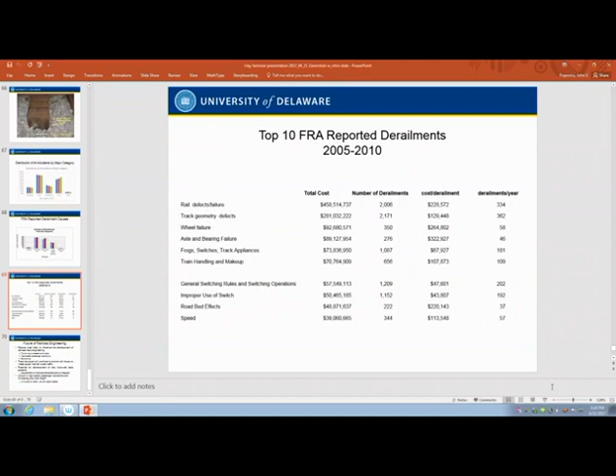Wrapping it up, since I'll leave a few minutes for questions. Everybody's going to run out the door anyway when I stop.

Future of railroad engineering is bright. Railroads are going to be around for a long time. Warren Buffett liked the railroad industry so much he bought BNSF. So you can see it's not just me talking. People who really look at the finances are talking about it.

You look at any new city being built, or any growing city, you're going to see a new rapid transit system, either light rail or heavy rail. I like the story of Los Angeles, it's my favorite.

Los Angeles had a wonderful rail system in the early part of the 20th century. Along came the highway, the car era, and they tore up their entire trolley and rail system. Then, of course, we all know about traffic in California. So along came the 1990s, and they had to build their new Red Line from scratch. That was such a success, they built 5 other lines since then, and they're still looking to expand. So they've gone from rail to cars, back to rail. And no modern city—if you look at sustainable cities, everybody's going to talk about metros.

When you build them, somebody needs to do the engineering. As we said, some of these problems aren't just about increasing the size of that rail—that doesn't work. We really need to do real engineering. So you guys have some jobs out there. That's the good news.

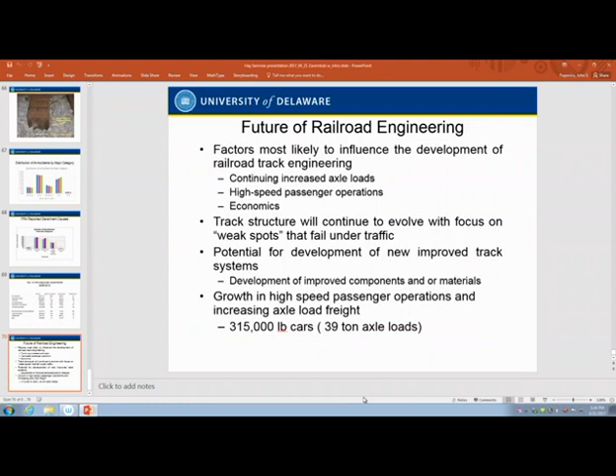That's an excellent question. It depends on what your trade-off analysis is. If you're dealing with classical engineering trade-offs, such as maintenance-related costs—for example, if I was doing analysis of wood versus concrete ties, and I have done those analyses a number of times—most of those trade-offs are easy to quantify because I can quantify...